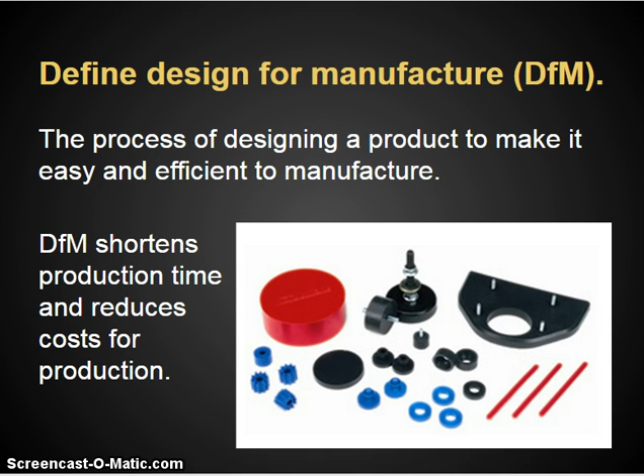By manufacturing. Now, remember, the light background is going to be on the tests for 2016, so just be aware of that. Now, this is just kind of a reiteration.

Design for manufacture is in pretty much every product line when it comes down to it, but the implementation is different depending on what manufacturing processes are needed to use. Focus is not just on the components, but also labor, quality control and assurance, distribution, all of that kind of gets into it.

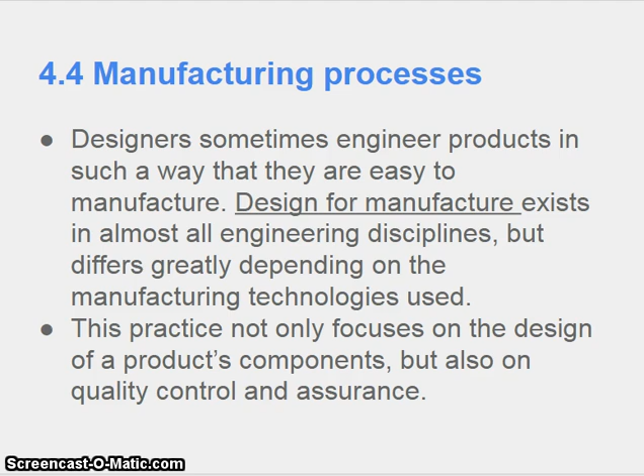Regarding international mindedness, you want to link this to the way new technologies are being used and how they can impact regions all around the world. Like 3D printing, for example, is kind of a big one, and this is the first time that I've seen IB actually mention 3D printing.

But this is a neat process because it's all about the machine that does the manufacturing. The person who's running the 3D printer doesn't need to have any real skill set. They can just download a plan, run it on their printer, and end up with a specific product or design. You can design your own, or you can download them. If you're interested, go take a look at the website thingiverse.com. It's run by the people who make the popular MakerBot series of 3D printers.

They have thousands upon thousands of crowdsourced 3D printing parts that can be made for all different purposes. Everything from artwork to technical things to mundane things. Like you can 3D print replacement pegs that go into drawers to add new shelves. If one of them broke, you can 3D print one. Someone's actually bothered to take the measurements and make one of those. So there's a lot that's out there.

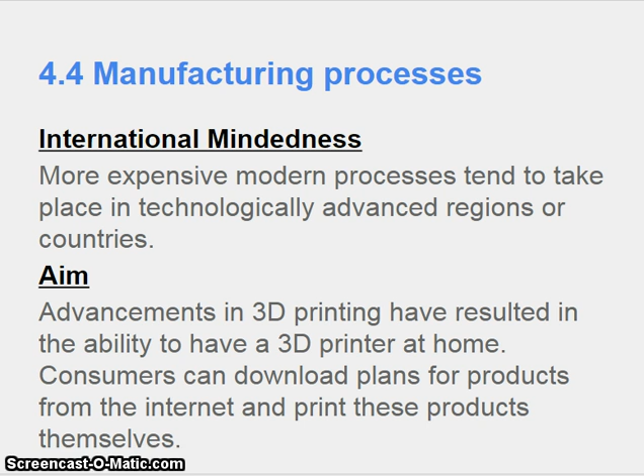Why should design for manufacture play a big role in the design brief? For manufacture, a lot of times is the biggest part of a design brief, because when you think about it, ease of assembly, the efficient use of materials, minimizing the amount of waste, minimizing the different types of materials that are needed, and the use of available tools and machines are a lot of times the biggest parts of getting a product to market and actually manufacturing it. Now, design for manufacture is split into design for materials, design for process, and design for assembly.

Now let's look at each of these. Design for materials primarily revolves around designing a product so that it uses less, less expensive, or more abundant resources. Design for process is designing a product so that the processing of the materials requires less energy, less resources, and also there's less steps that are involved. Designing for assembly is designing a product so that it's simple and inexpensive to assemble.

Remember, fewer parts means that a product can be assembled quickly and for less cost. Also, if you remember the SME video that you should have watched, fewer parts means you can avoid making an individual part so complicated that the machining equipment required to tool that part is extremely expensive.

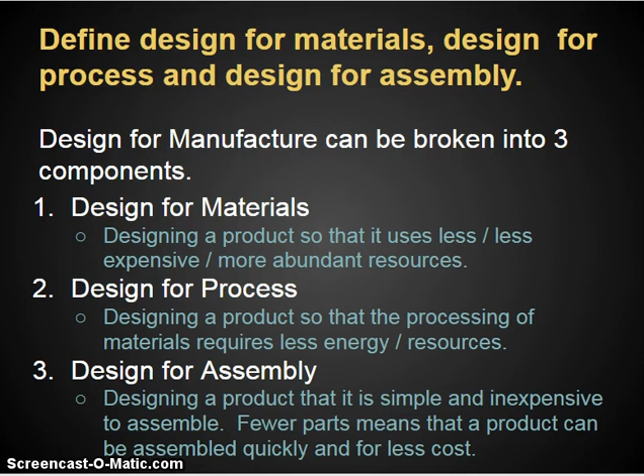Discuss three strategies that designers could employ for design for manufacture. Some of the strategies listed are minimizing number of components, using standard components, designing components that are multifunctional or for multi-use, designing parts for ease of fabrication, minimizing handling, and using standard sub-assemblies.

Using standard components and standard sub-assemblies is commonly referred to as using standard parts or commercial off-the-shelf parts. You'll see this in industry under the acronym COTS, which stands for commercial off-the-shelf—stuff you can buy in any store anywhere.

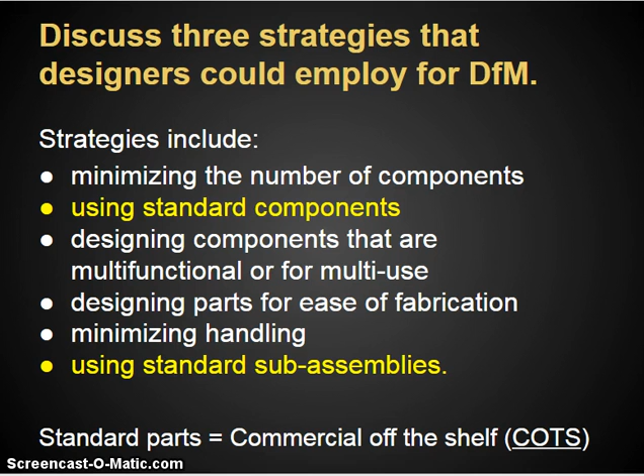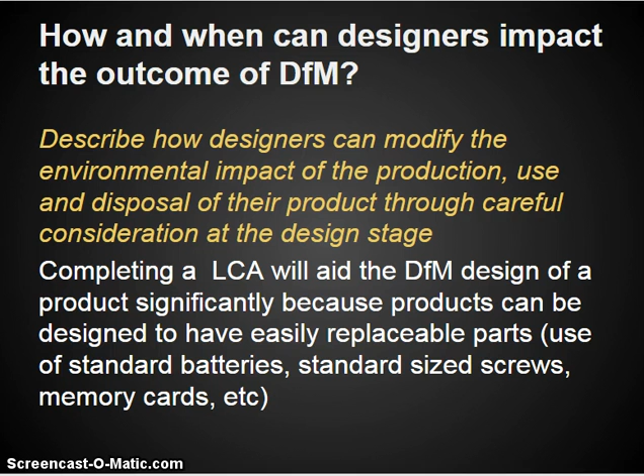Designers can actually design a part so that it has standard replaceable parts. For example, cell phones that have batteries that can be replaced. That way, when a battery starts holding less and less of a charge, as it frequently does, the end user is able to order a new battery and easily replace it on their own. If they use a standard battery size, it's easy to find something like that online, buy it, and replace your battery. Now instead of a phone that lasts 3 hours on a charge, it'll last a whole day. You can also use standard memory cards, micro SD cards, or standard size screws that can be easily found and replaced.

Define reuse, repair, recondition, and recycle. You've probably heard of these things before. Reusing is to use something over again. Repair is simply to fix it. Recondition is to fix and modify something and use it for a different purpose. Recycling revolves around disassembling, separating, and breaking down materials to form completely different products.

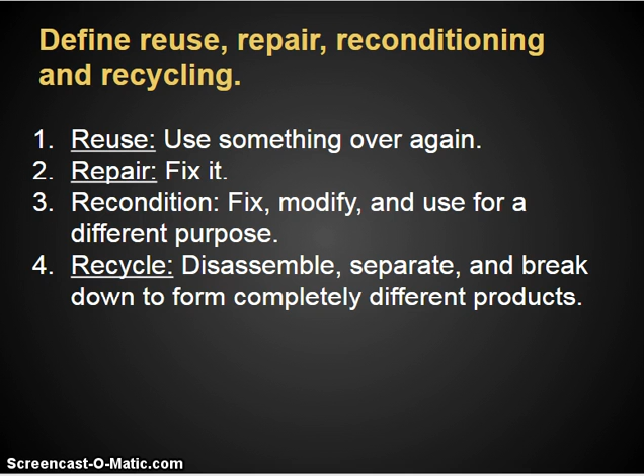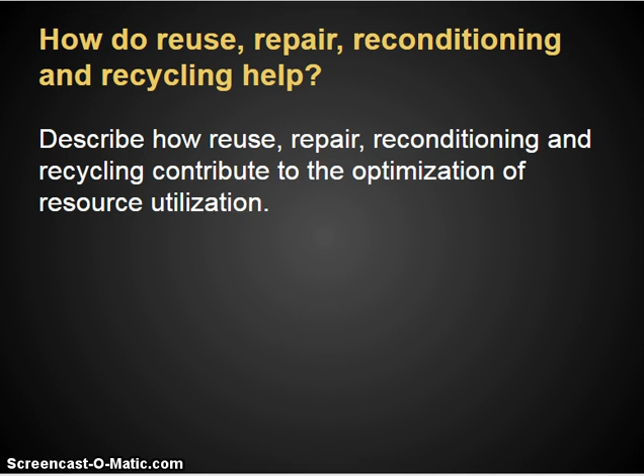How do they help? The big takeaway is that all of these things optimize resource utilization—they allow resources to be used more efficiently and reduce the number of resources that need to be used.

Take a look at how these strategies can be applied to the design of product, including packaging. Let's take a look at a few things specifically. Here's a neat example.

With what's left over, that chassis gets sent back to the manufacturer. They will replace the battery, recondition it, reload it with film, and then resell it. So disposable cameras are actually surprisingly green when you think about it—there's not a whole lot of waste. You don't throw them away when they're done. They're not really disposable; you get several lives out of these things, but you just don't see that because they get sent back to the manufacturer, who will then recondition and resell them.

Vacuum cleaners have been designed more and more to use either reusable or no filtration systems, or filtration systems that can be easily cleaned and removed.

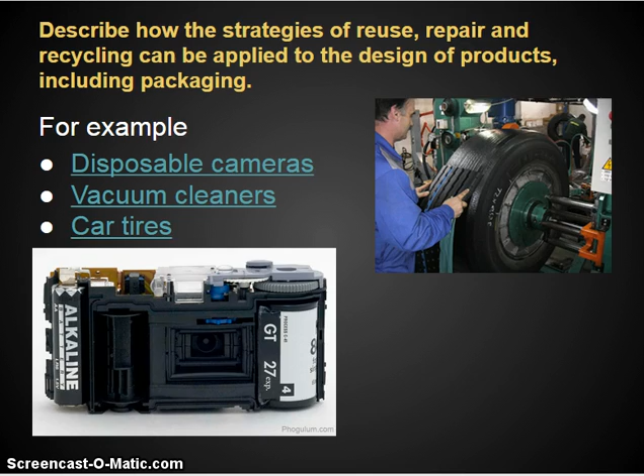There are three material groups that can be easily and economically recycled. The big ones are thermoplastics, metals, and glass—all easily recycled because all of these can be broken down with just heat.

Thermoplastics are plastics that will remelt, which we'll get into in topic 4. Metals, also covered in topic 4, can easily be melted as long as you sort them into the proper types and know how the alloys work. Glass is one of the easiest materials too. Glass and metals are probably the two easiest things to recycle. There's actually some value in metals. A lot of people recycle metals, and you can get money for taking them to the scrapyard, which has actually become a problem around the Cleveland area. All of these are easy to melt down.

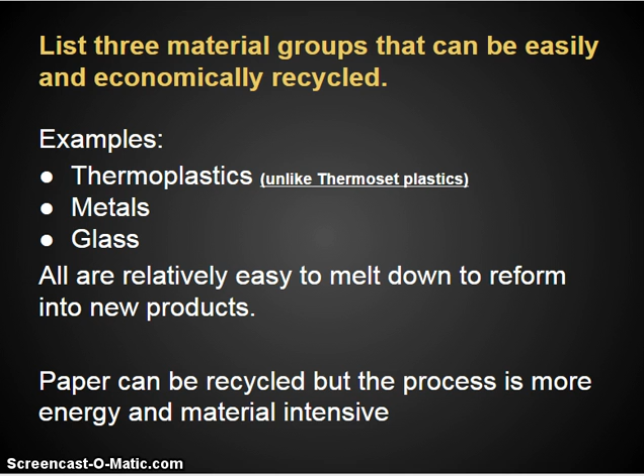Paper products can be recycled, but that process is a lot more energy intensive, and it can require a lot of specific chemicals to clean and bleach the papers. You don't need any of that for recycling thermoplastics, metals, or glass.

Many products comprise several different materials, and these materials have to be separated in order to enable recycling. One thing we'll get into is composite materials - engineered materials made up of multiple different components. Most of the time, to recycle these, you have to break them down. For example, reinforced concrete, or concrete that has rebar in it, can be broken down and recycled. Metal can be melted down and recycled, but you have to separate those components first.

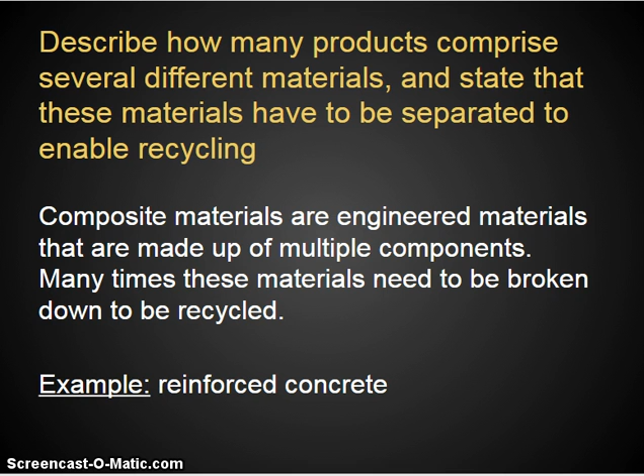Reinforced concrete is actually fairly easy when you compare it to something like fiberglass. Fiberglass is a composite material made of a textile fiber and also a ceramic or polymer shell. Those individually can be recycled, but when combined together to form a composite, it's usually very difficult to recycle them, if it's even possible.

Let's discuss the issues underpinning the economic recycling of materials. You need to consider collection, energy and processing considerations, and redistribution. In order to recycle, you need to collect, sort, and clean materials. Now at St. Ed's, we have single stream recycling containers, which makes it a lot easier. There's actual technology now that can automate this whole separation process, making it much more efficient.

Recycling uses energy just like all other refining processes. As I said, some materials require a large amount of energy and chemicals, like paper, to recycle. The recycled product also needs to have the same or similar quality characteristics as the original, or manufacturers might opt for unrecycled materials. If you can recycle something but it has very low quality, no one's going to want to use it.

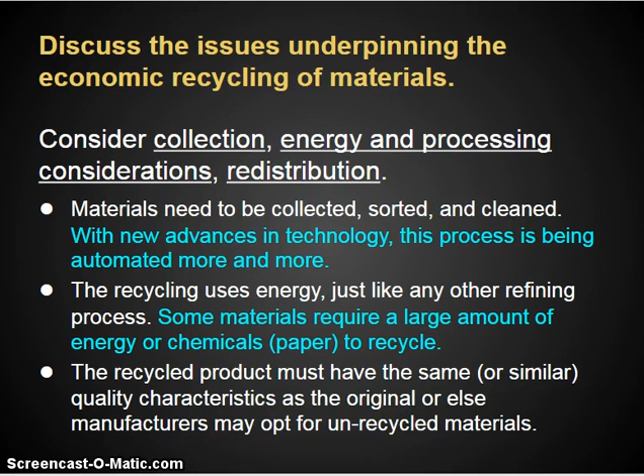Design for disassembly is another concept - making a product so that it can be easily disassembled and separated, so parts can be either reused or recycled. In building construction, this is known as deconstruction, where you carefully take apart a building rather than just bulldozing the whole thing. The Habitat for Humanity ReStore is a place we've talked about before that takes many of these components from houses and resells them for use in new homes.

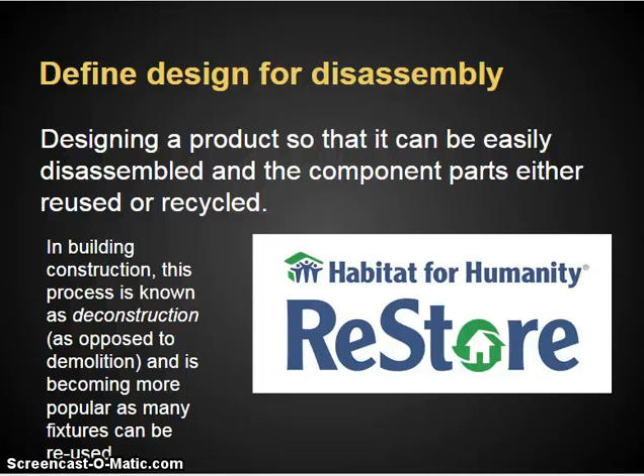Design for disassembly is one aspect of design for materials and will facilitate recycling products on disposal. Remember, to recycle, products need to be cleaned and broken down so the actual materials can be recycled. Making them so they can be easily and quickly disassembled makes the recycling process much faster and more efficient. It's usually a bad idea for recycling if you use adhesives that can't be broken down, like thermoset adhesives - those are not very recyclable - or fasteners that have to be removed.

Let's discuss two strategies designers could use to employ design for disassembly. First, use components made from a single material rather than composites - that makes individual components easy to take apart and disassemble. Second, use thermoplastic adhesives. Thermoplastics, unlike thermosets, will actually break down when heated, so a thermoplastic will come apart when you heat it up - pretty easy to do. Also use snap fittings and parts made into the aspects of the product instead of welding and gluing. There's a link to an article you can read for more information on design for disassembly.